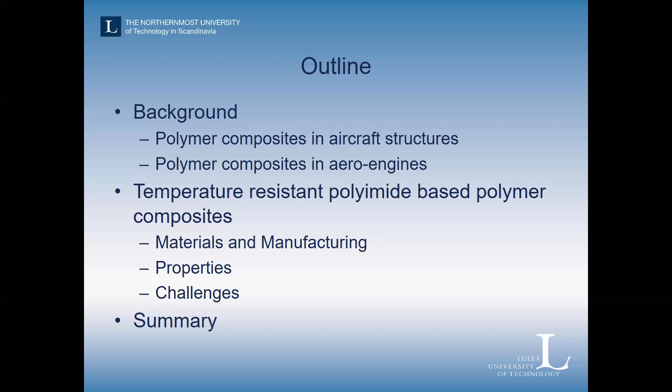Starting with the background, in a very general picture, most of us working with composites are well aware that the lightweight potential of composites is useful for use in the aviation and aeronautics sector. This sector, at least until recently, until everything turned upside down with the pandemic, had a prediction over a very long period of time of around 4% annual growth in the overall aeronautics industry, which is quite a big growth.

There will obviously be a setback due to the decrease in traveling during the COVID situation, but most likely and hopefully we expect to come back to a new normal situation after some time, and it's likely that although there could be a difference in growth rate, it's still expected to grow further. The drivers have been globalization and economic growth of wealth for the population on earth, but with that growth also comes environmental consequences that I think all of us are aware of.

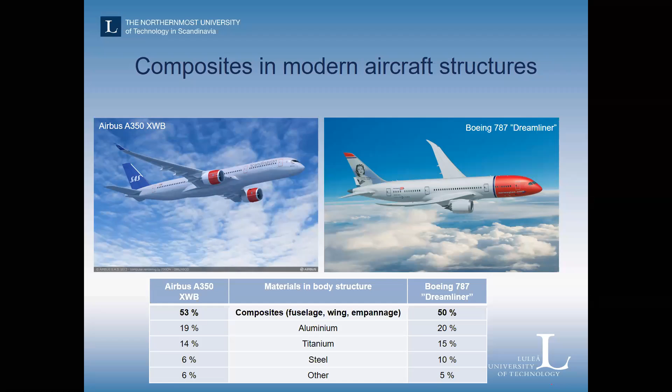Looking back at the 2% per year improvement we've seen, we find composites as part of the solution in many cases because of their lightweight potential in recent aircraft. If we look at the Airbus A350, one of the more recent aircraft they started to produce, as well as the Boeing 787 Dreamliner, the common denominator of these aircraft is that they are largely made from composites. More than 50% of the structure, including the fuselage, wing, and empennage at the back of the aircraft, is made from composites, and that is one cause for the fuel efficiency increase by reducing weight.

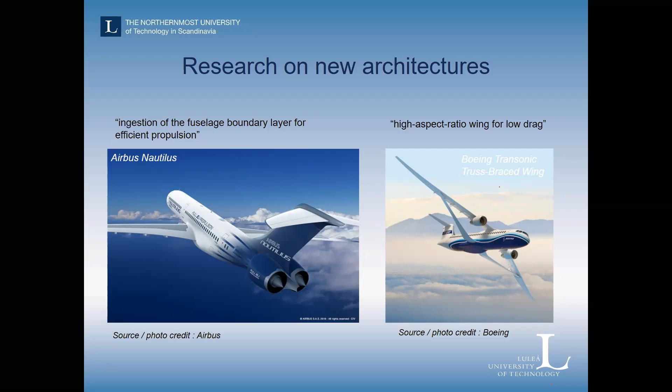So where are we going at the moment? If we look at some innovative concepts currently at the research or concept stage, there are some ideas presented a few years ago but also currently being considered for the next generation aircraft. One is represented here by having engines close to the fuselage and using the boundary layer, where the airflow is good for reducing the need for thrust to drive the aircraft, creating a beneficial effect that doesn't require much force or thrust to drive the aircraft forward. Another way to reduce drag is to have, as indicated on the right, high aspect ratio wings, long slender wings, again lightweight, to further reduce the drag of the aircraft.

New architectures also include flying wing concepts that combine aerodynamic efficiency and structural efficiency by integrating the structure already into the wing. These are concepts, and in recent years the interest in electrical propulsion has also increased, with different concepts being suggested, such as distributed turbine generators and electric fans on the wing structures, in order to move away from the use of fossil kerosene fuels and use electricity as power for fuel.

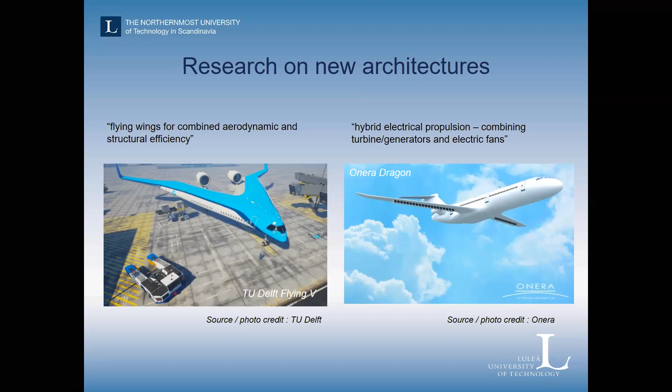In the last few months, I think it was in September, Airbus introduced a concept and an ambition to develop new alternative fuels, meaning hydrogen propulsion using hydrogen gas as fuel in the aircraft. This is currently being launched in Europe by Airbus as a concept aircraft, a ZEROe concept aircraft.

They foresee that a possible solution for the next generation could be, for instance, a turbofan aircraft with hybrid turbofan engines that provide the thrust. The fuel, in this case liquid hydrogen, is stored in the rear of the airplane, so it's basically an extension of the aircraft. Instead of having kerosene fuel in the wings, there's liquid hydrogen in the rear.

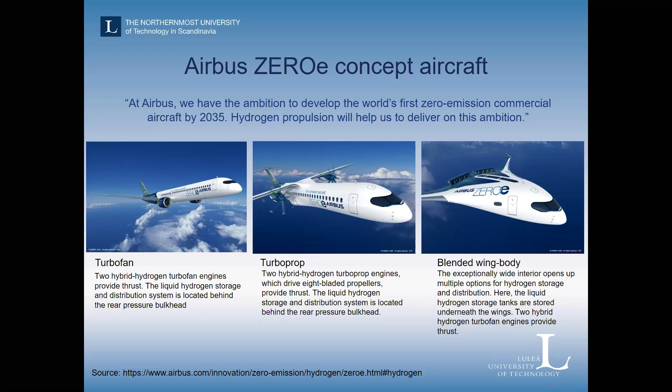Similarly, for a turboprop and more regional aircraft type, they foresee and envisage studies on a blended wing body concept, where hydrogen storage could be introduced in the wing structure or under the wing structures. These are very recently presented concepts, indicating an increasing interest in hydrogen as an alternative fuel, and this opens new research channels for the composite community, which I will come into.

Not only is the body structure of the aircraft made with composite, but if we look at recent developments of aero-engines, we also find carbon composites in these structures.

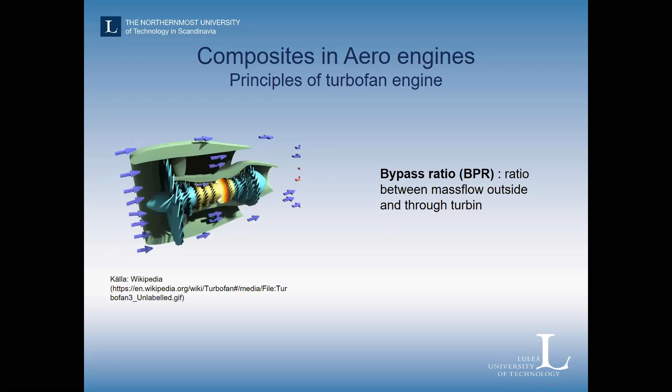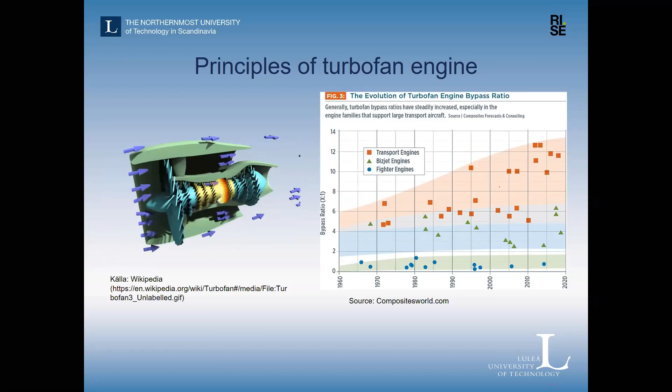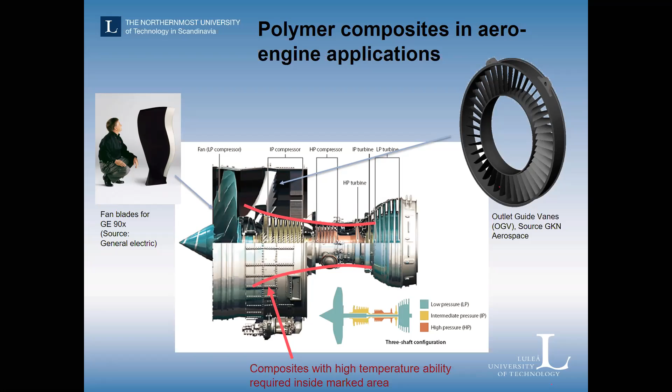We see that, for instance, the fan blades at the front of the engines are made, for some recent turbofan engines, from composites, carbon fiber reinforced epoxy. Research is also being done on the outlet guide vanes, OGVs, placed behind the fan—these are static vanes that don't rotate in the engine but transfer the load from the compressor to the outer fairing of the engine and then on to the aircraft. So it's a highly loaded structure, and currently there's been quite a lot of research into using carbon composites for that too.

The carbon fiber fan blades you find in General Electric engines—this is a rather large engine, so the person here on the right is small compared to, or similar in size to, a fan blade, rather large structures.

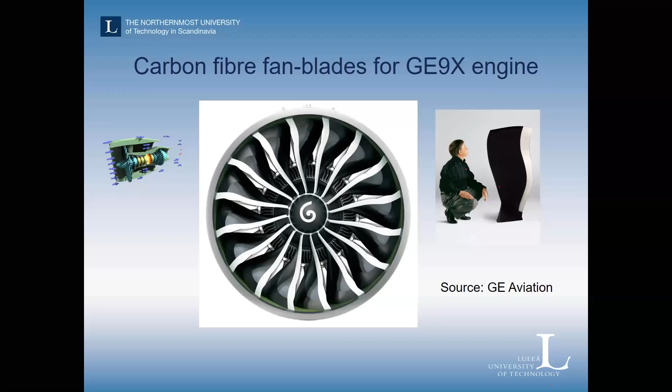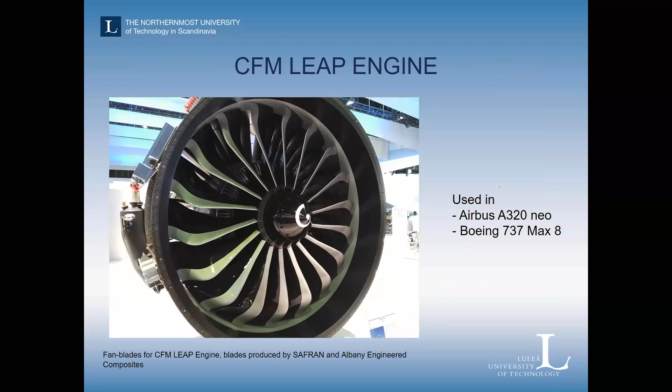Another example is the LEAP engine, whose blades are produced by a French company, Safran, also made in carbon composites. This engine is used in a lot of the Airbus A320 and Boeing 737 MAX aircraft, so they're already in use.

As indicated, the outlet guide vanes, to my knowledge, aren't used in any aero-engine at the moment, but there's quite a lot of research going on, and this is a picture of a demonstrator structure that was built in a European project some years ago.

And to the right, there is some—I mainly took this image because two of my former colleagues are in that image, so they can be found there.

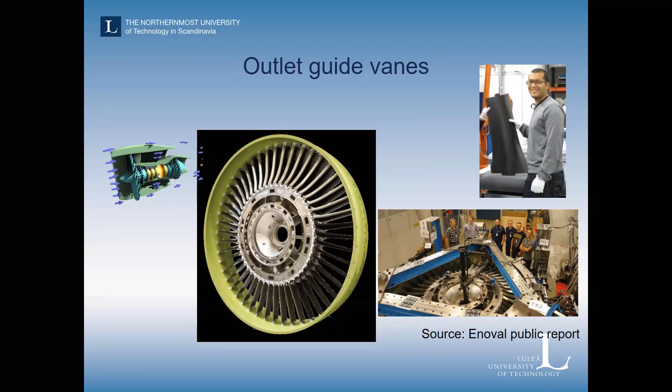So with this as a background, I think the motive here to give that background is to convince and argue that aeronautics technology development will continue to be a strong driver for advanced composite research. And in my opinion, what is currently the main area for research that is going on and will be required for the future is this cost and eco-efficiency driven manufacturing.

A lot of structures were previously made with autoclave curing for the fuselage and wing structure. This is a very costly method, so out-of-autoclave processing of thermosetting is something there's a continuous need to develop and mature.

Also, bio-based composite constituents, both fibers and matrices, is an area that needs to be developed, as well as thermoplastic composite processing and fiber reinforced thermoplastic composites for fuselage. There's quite a lot of work going on developing PEEK and this type of high performance polymer composites, as well as recycling.

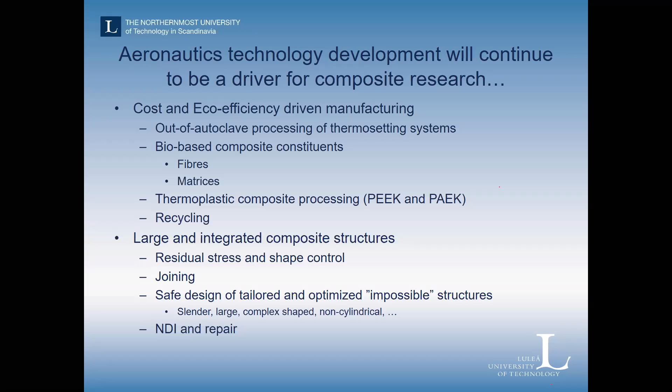Joining continues to be an issue. And again, tailoring and optimizing the composite structure, non-destructive inspection and repair, is clearly an area of focus.

If we look at the trend now to start looking more into hydrogen as an alternative fuel, it will require new storage solutions for the aircraft. Most likely composite pressure vessels are likely to be used, in my opinion, for hydrogen storage in these new structures. So it will put another requirement, and of course safety aspects will be important.

So materials, manufacturing, and sizing of composite pressure vessels or storage solutions for hydrogen will be an important aspect that needs to be developed.

Multifunctional composites like morphing structural batteries is an area which is also interesting, where you can use composites both for storing energy, as a structural component, and for thermal management.

But the last area, which will lead me to the next stage of the presentation, is really in order to be able to produce these larger engines and to have temperature resistant composites. This is an interesting and needed area to do research, which can be used also in aero-engines. An aspect there is really manufacturing, because it's not very easy to manufacture.

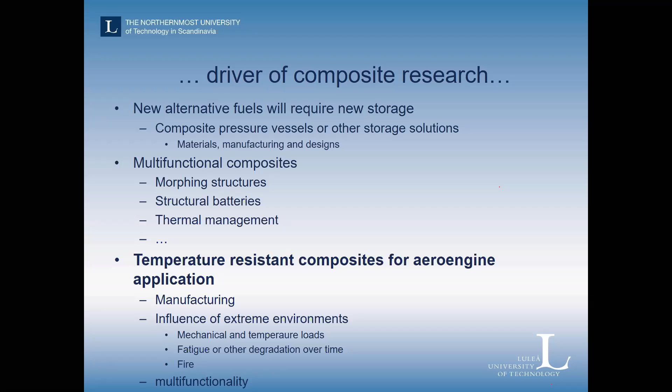So this leads me to the second part of the presentation, where we will look more closely into composite materials for high temperature applications.

I will show this indicative chart on different polymers, where the glass transition temperature is on the y-axis, and in this case cost is on the x-axis, indicating some of the high performance polymers that can potentially be used for high temperature applications.

But I've shaded out the ones that are really below, let's say, Tg below 200 degrees, which means phenolics and epoxies will not be discussed much in the coming slides.

So what I consider when looking into high temperature are the bismaleimides, cyanate esters, polyimides, and phthalonitriles. All of them are more or less expensive - some are extremely expensive - but all of them have high glass transition temperature and various degrees of thermal stability.

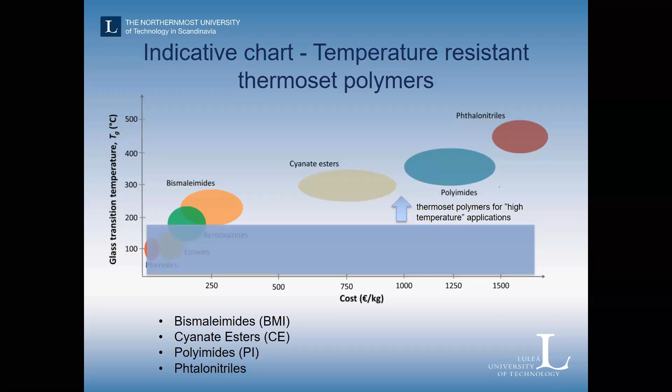I will present the polymers that we've been working on mainly, the polyimides, in the coming slides, and what we've done in the area of polyimide composite development, both in my previous work and what I continue to do at the university. So this is the development strategy for when we work with high temperature polyimides.

It's nothing revolutionary here for composite people. We are all aware that in order to achieve performance of a structure made in composites, we need to take into account the manufacturing, the material and the properties and the design in a very holistic way, since we manufacture the structure at the same time as we do the material, and we also design both the meso and micro structure at the same time, and this will influence the manufacturing and the type of material we can use. So this is not a surprise to you.

What we did was we started really in 2012. So it's been going on for about 7-8 years now, and we've been using mainly polyimide types. We've been working with end users and material suppliers, universities and research institutes, the ones that we have, and try to mature technology for the high temperature polyimides simultaneously in different areas, both when it comes to materials, manufacturing, and properties.

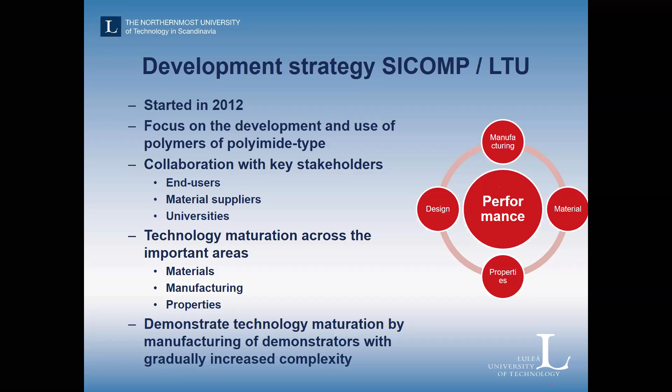Gradually increasing the complexity of the components. Early on in the development, we started out by agreeing that we should focus mainly on the process of resin transfer molding for manufacturing, meaning that we work mainly with systems where we start with a dry preform, lay up and drape the preform in a preform tool, put the dry preform in a mold, close the mold and inject the liquid resin into the mold, then cure it in the mold, demold, and do the final processing.

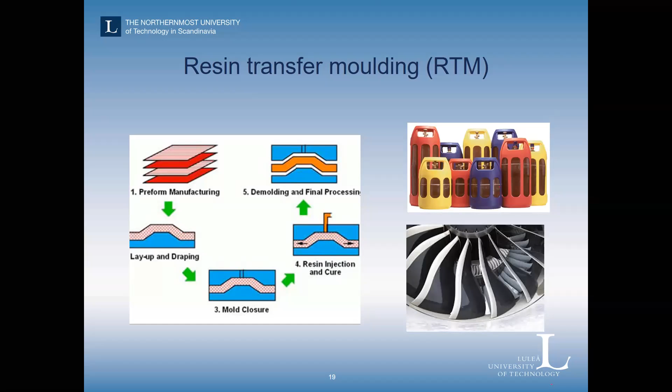So this is the same process that is used, for instance, for some blades, and also for some other applications. So this is the process we've been mainly looking into, and then we've also been using. Typically, we've been using a lot of this, as you will see.

The processing of the high temperature material is done at high temperature, meaning that we need to adopt the reinforcement to that. So we can't really use so-called non-crimp fabrics with stitches; we use primarily weaves, carbon fiber weaves, and the baseline material we've been using is an 8-harness satin weave most of the time for the development work, but also in some cases other alternative architectures, like plain weaves, thin ply materials - that is lower surface weight reinforcement that can produce really thin ply composites. These are a bit coarser when it comes to the structure.

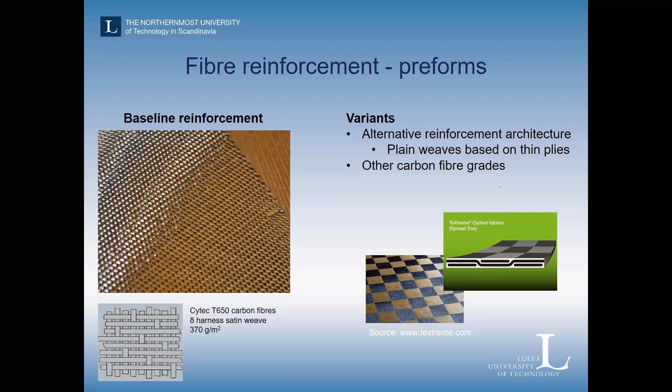We've been working closely together with a company that develops and produces polyimides, this chemistry, so we developed this together with them. This Phenylethynyl-terminated polyimide system, also sometimes referred to as PETI, is a thermosetting resin. When it's provided, it comes as a low molecular weight resin formulation, and you see the picture of how it looks when it is delivered for processing. It comes like a solid material or a powder in its uncured state.

It's based on the 6FDA dianhydride base, and then through an imidization process, that's creation of a reactive end capper - phenylethynyl end capper - onto the structure, and also to some extent some reactive spacers that are also chemically reacted onto this to create the polyimide monomer. This can then, in the process that we're doing, be cross-linked to create a highly cross-linked polyimide with high Tg.

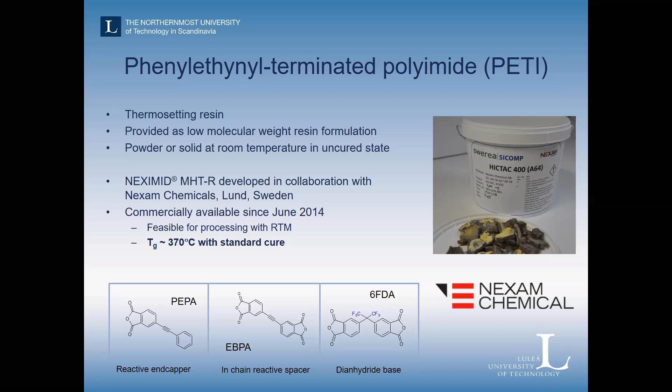So what we've been doing in the early stages of development, when looking into the first step to see how to work with these materials, has been to look into simple or straightforward DSC analysis to run dynamic heating experiments with the primary goal to analyze the cure kinetics and the onset of curing reactions.

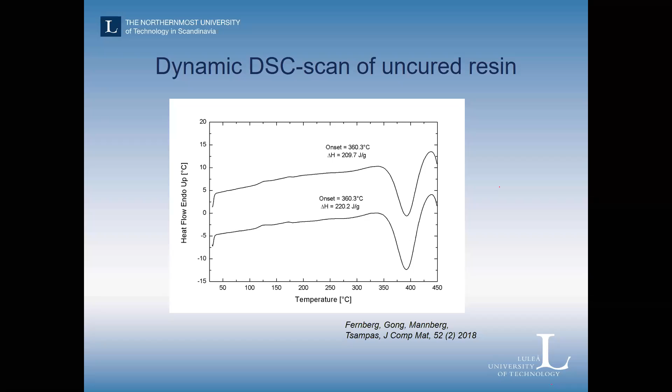So this type of DSC curve shows here that the onset of curing is indicated by the onset of the peak, or the peak that is upside down - the valley here - indicates when we start to have a reaction in the cross-linking. There's an onset of this curing that starts at around 300. In this case, it indicates 360, but really the curing is starting a bit earlier than that, so we can have reactions that start at lower temperature, but the main reaction takes place at 360 or even higher. The total heat of reaction during a cure is around 210-220 joules per gram, so it's slightly lower than a typical epoxy system in terms of reactivity and exothermic reaction.

Rheology characterization is important when looking into the processability of these types of resin. For that purpose, we've been using a rheometer in two modes: viscometry mode, with continuous shearing of the viscous fluid, and oscillation mode, where we detect the complex modulus and complex viscosity, capturing both the elastic and viscous part of the response.

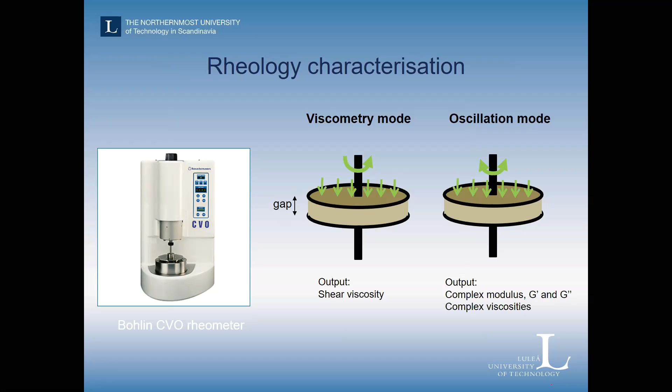So two modes. The first one, complex viscosity, we've been using primarily to estimate the time to gelation of a curing system, in order to understand how long we have for processing these materials. These are complex viscosity measurements made at 330 degrees. It's not where we have the highest reaction rate, but we determine this for elastic and viscous modulus.

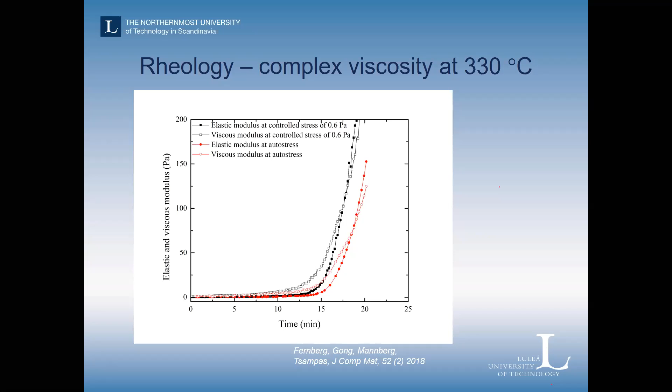The filled circles are for the elastic part, and the viscous part is the open circles. Traditionally, the time to gelation is determined in this type of rheology setup by the intersection between the elastic and viscous parts - when they cross each other, that's an indication of gelation. At 330 degrees, we don't have much time, but we have around 15-20 minutes to fill the mold, which is quite short but still something to work with.

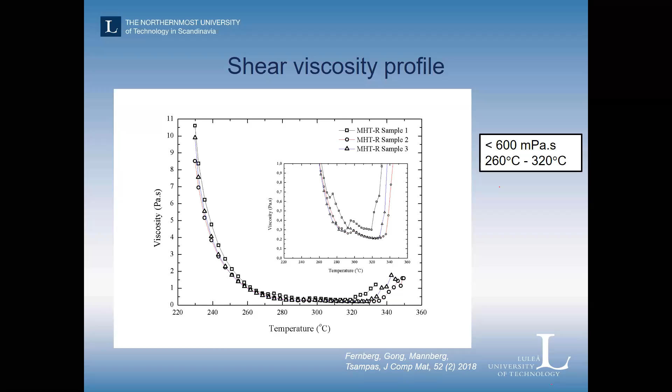With that information, one can start composite manufacturing, and for that purpose we have used an RTM facility for high temperature RTM. This unit has the possibility to process resin at temperatures up to 300 degrees. Essentially, on the image here - let me see.

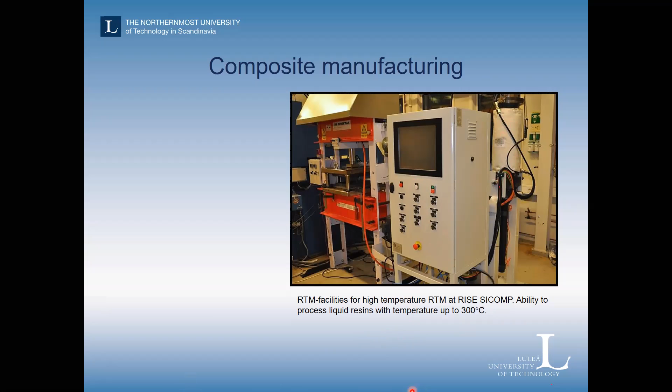So what is done in practice as a curing procedure for these materials: we start by melting and homogenizing the resin inside the chamber, keeping it at 240 degrees because we know it melts there. We do a degassing operation at 240 degrees - it is liquid, but rather high viscosity, with no reaction occurring.

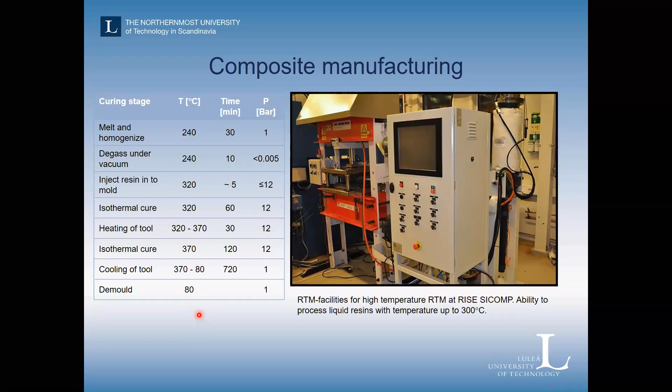We are then able to inject the resin at that temperature through the pipes into the region, and do isothermal cure inside the mold, keeping the mold at 320 degrees to reduce viscosity and do the mold filling. Then we do an isothermal cure, heating the tool for 60 minutes at 12 bar - high pressure, isothermal cure at 370 degrees - then cooling slowly down to room temperature for demolding.

Well, I start to have some issues with my presentation here. Let me see if I get back. I apologize.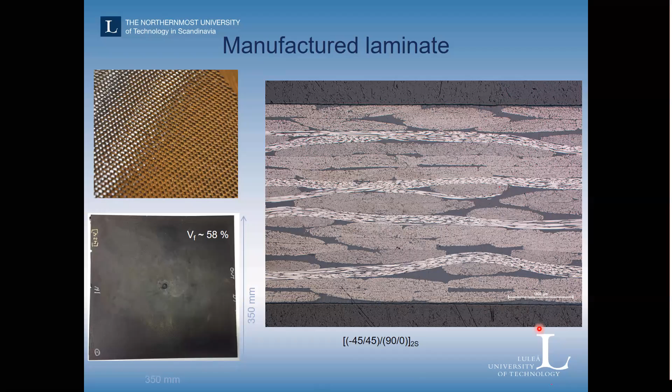We run DMTA characterization to characterize the thermal properties, and we see that we have some materials behaving as we're expecting, with a TG of around... in this case, no post curing, there is an onset TG of around 330.

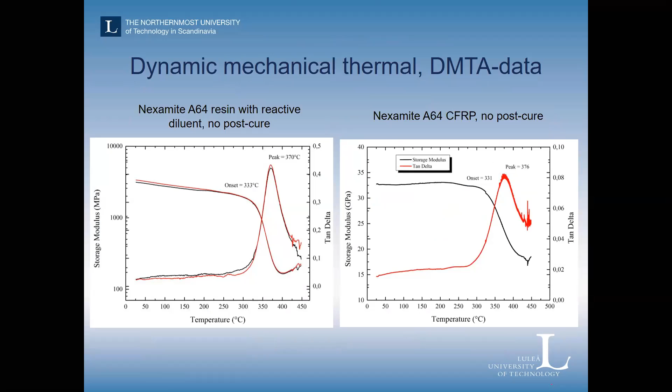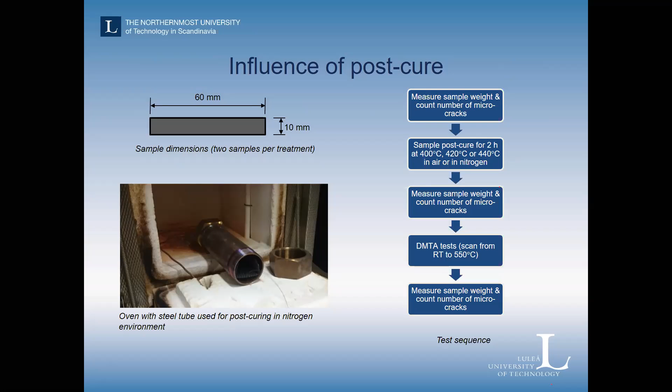If we look at nitrogen curing, we have a higher glass transition temperature than when we do it in pure air. What is peculiar is that we don't measure an upper limit in the tests we have been running. We don't have a very good explanation for this yet, but it's not likely that it's some kind of artifact. We're thinking that this is...

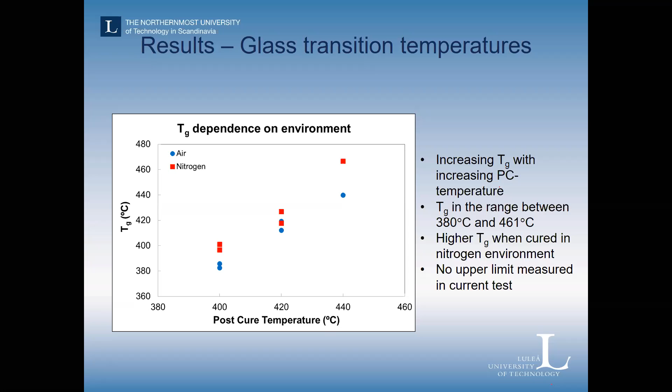Then there's a weak tendency that weight loss increases with the post-curing temperature, but not significantly. After DMTA, there is definitely a decrease, but that is rather expected since we're going up to very high temperature and doing it in air. It was a bit difficult to conclude much because of the variation in initial properties of the material.

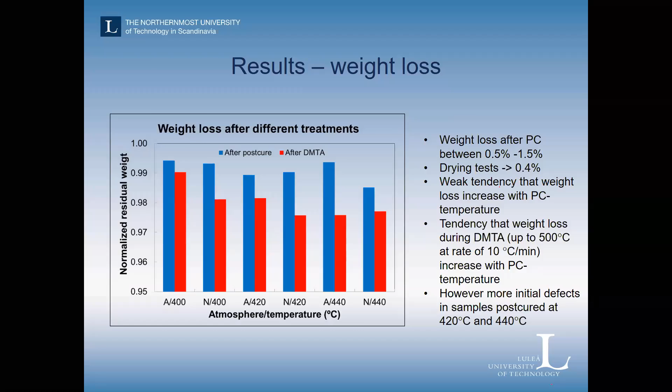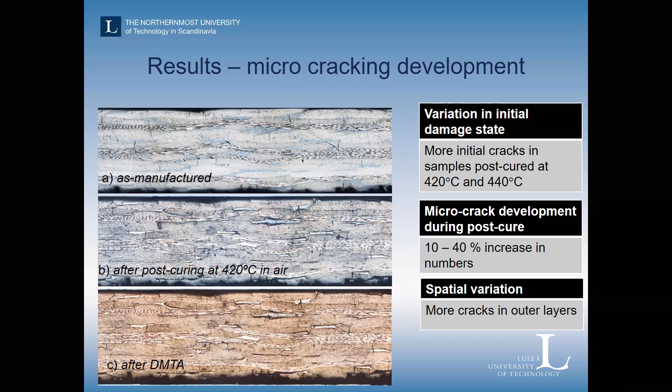When we look at this material, we notice that on the surfaces there are micro cracks developing due to aging, and we see that the increase in numbers is around 10 to 40% on the surface of these materials on the edges, with more cracks in the outer layers—clearly something that needs to be taken into account when looking into how they operate on the surface.

If we increase the temperature to 320 degrees and test the properties at that temperature, there is a decrease mainly in compressive properties in terms of stiffness.

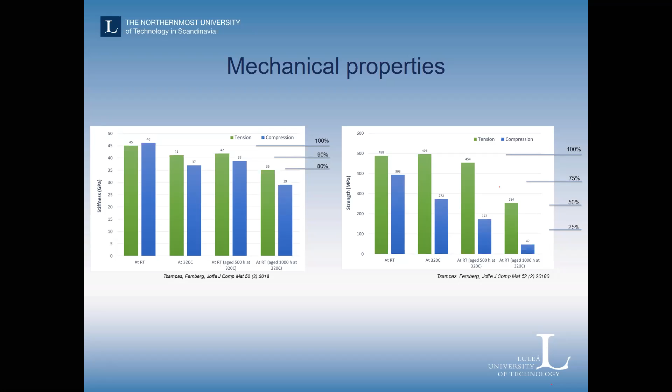So coming to where do we need to continue to work in order to take this into a more elevated state of knowledge and maturity. The three areas I would like to raise are cure optimization and residual stresses. This is critical for these kinds of materials, and we need to continue to understand better the cure kinetics and property development during cure. One way is to understand viscoelastic contribution to stress relaxation that occurs during manufacturing at this temperature. The other thing is thermal oxidative stability, again the influence of physical and chemical aging, so work to identify and decouple the degradation mechanisms that occur at high temperature. And something I haven't mentioned a lot is fire resistance, but I will.

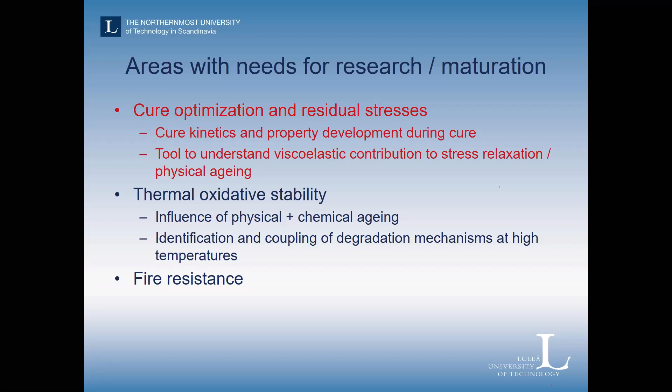So, cure optimization and residual stresses. What is this? Just to illustrate why this is so important, especially for these composites.

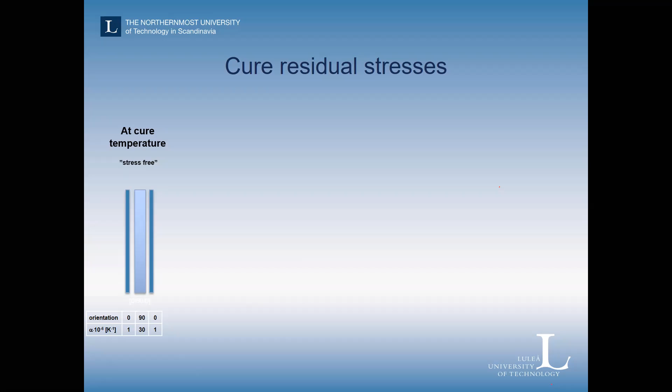If we consider the different layers, when we do the cure and everything is in a liquid state, it's a stress-free state. If we think of this as a laminate, viewing the edge of a laminate, the fibers in the outer layers are in the 0 degree direction, and the middle layer fibers are in the 90 degree direction. There's a big difference in thermal expansion coefficient for these different layers. So what happens when we cool it to room temperature?

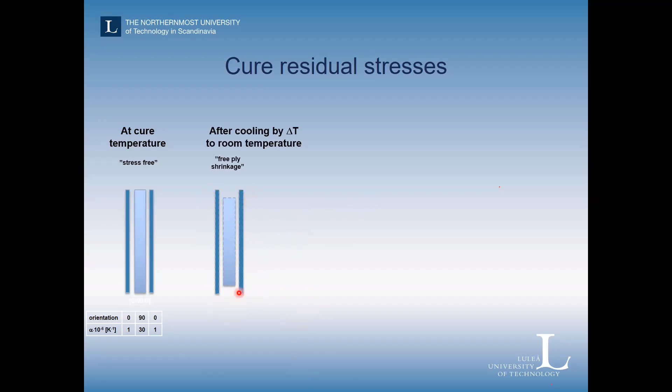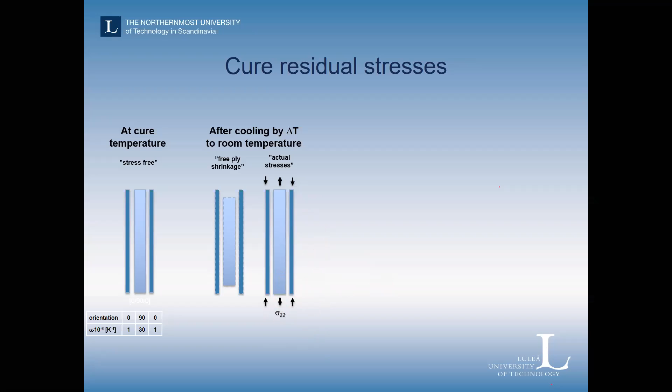If we just consider the free plies, the outer plies in the 0 degree direction don't want to shrink at all because it's carbon fiber with very low thermal expansion coefficient, whereas the middle layer wants to shrink. But because they're glued together, they can't shrink independently, they shrink the same amount. This means the 90 degree layers are subjected to tensile stress because they want to shrink but can't, whereas the 0 degree layers are under compressive loading. Especially the tensile loading on the 90 degree layers is very important and provides very high stresses, and this is what sometimes creates the cracks we observe.

If we just take the linear elastic laminate theory, we know the residual stresses depend on the thermal expansion coefficients, the stiffness, and the delta T. In this case, the delta T is up towards 300K, so it's very large. If we calculate a simple estimate, we notice that in principle the stresses generated during cure are up towards 75 megapascals, which is almost in the range of the theoretical strength of a 90-degree layer in the transverse direction. So it's more surprising that it doesn't crack more.

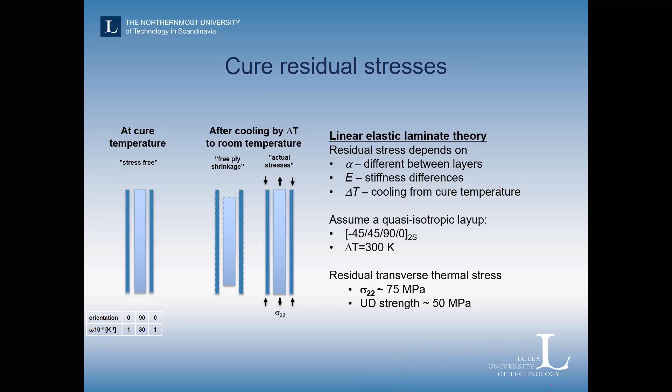This is something we're trying to develop further understanding on, because it's very important both for the part shape deformation and all the built-in residual stresses in the material. It's also important to take into account the interactions with the tool, since we're working with RTM processing, and whether there are other stress dissipating mechanisms.

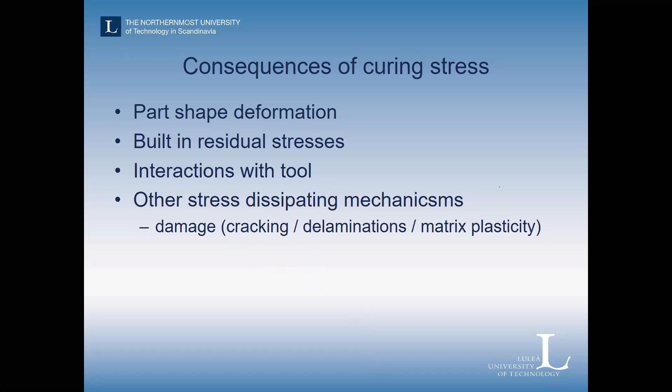I think I will skip this one. Another area is thermal oxidative stability, the influence of physical and chemical aging, which is needed to understand really how we can use this material under these severe conditions, what are the limitations, and how we can design components with these materials.

First of all, we need to understand the influence of physical aging, which comes from viscoelastic processes or reorganizations of the molecules below the Tg that take place in these composites. We need to understand them and compare them to understand how important they are in relation to the chemical aging that also occurs, where in the test we're exposing the material to high temperature, where we can start to have hydrolysis oxidation reactions that can eventually cause chemical bond breaking and mass loss due to outgassing.

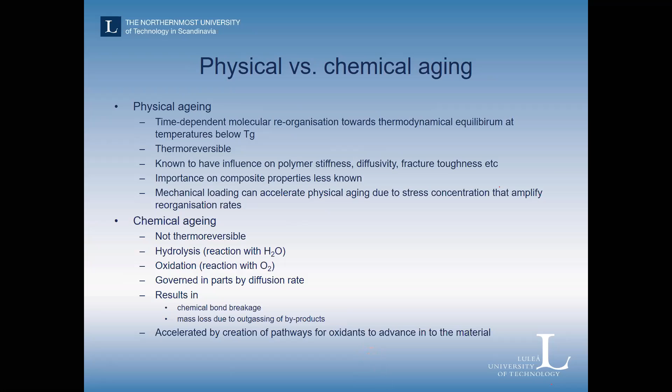And this can then also be accelerated by the creation of cracks in the material. We already saw the consequences of physical and chemical aging on the properties.

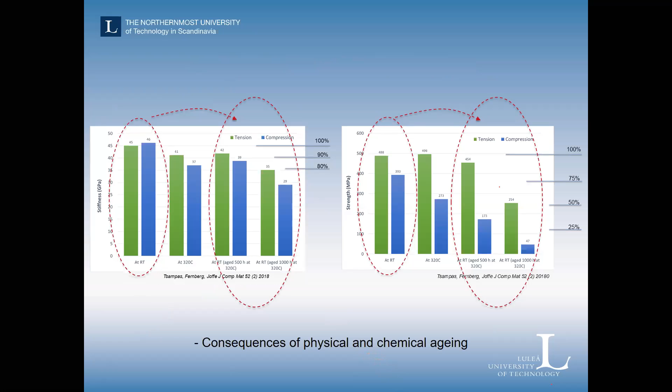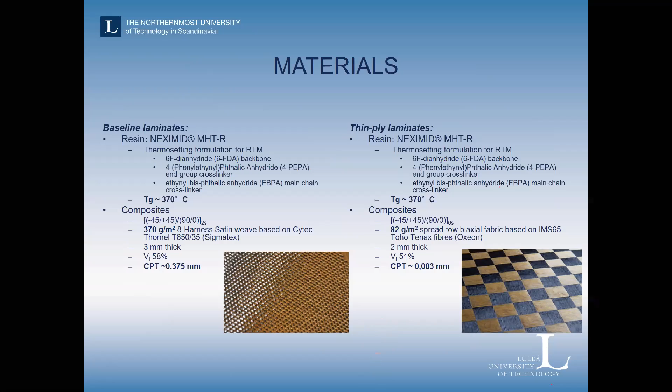So what we've done is show some results from a study we conducted, where we used this thin ply material on the right, with really low surface density fabrics that create really thin plies. The idea here is, we know from previous work that thin plies have a tendency to prevent this transverse cracking that could be caused, for instance, by thermal stresses. We wanted to see if by introducing thin plies to prevent these cracks, we could decrease the aging of the materials. The hypothesis was that with fewer cracks in the material, there would be less pathways for exposure of the material to oxygen.

So we tested these materials. These are cross sections of laminates that we tried, shown to scale. To the left is the baseline material, and to the right is the thin ply material. This indicates that the thin reinforcement creates quite a lot of thin plies compared to the coarser, higher surface weight laminate, but they have rather similar volume fractions. Let's see.

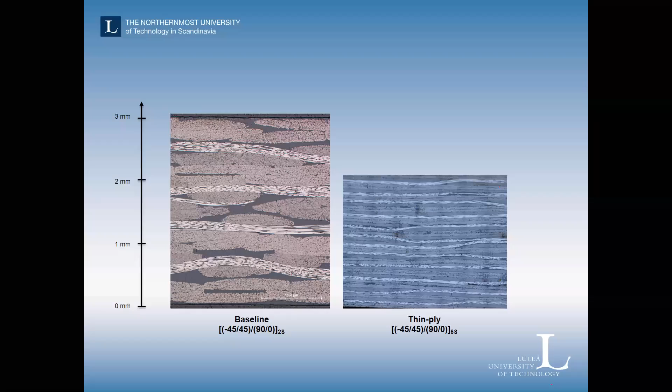Let me see. Okay, now it's responded. It took a while.

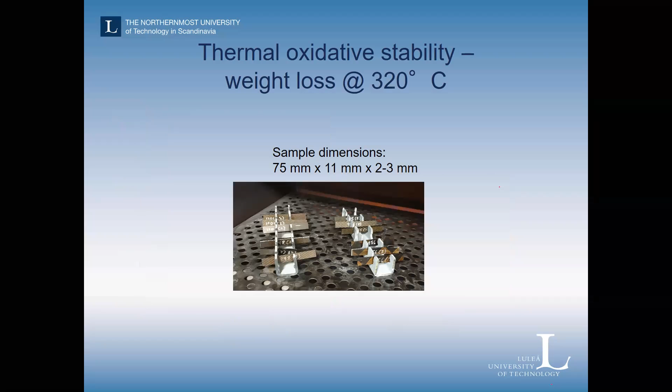So we do thermal oxidative stability testing by measuring the weight loss at 320 degrees over time. These are the type of samples we place in the oven and measure the weight loss over time. We obtain results like this, where we have the weight loss in percentage of mass loss versus the matrix weight over time.

During the 500 hours, we notice an increase in the weight loss. The yellow one is a baseline material, the satin weave. The red one is also a baseline, the same but from a different manufacturing batch, and the green one is the thin ply. What we notice, first of all, is an initial loss due to moisture loss in the very early stages of the test.

Then the weight loss starts to increase - there's an accelerating trend. There's quite a big variation between the batches, but small variation within the batches. One thing we clearly observed is there's no noticeable improvement from the thin plies.

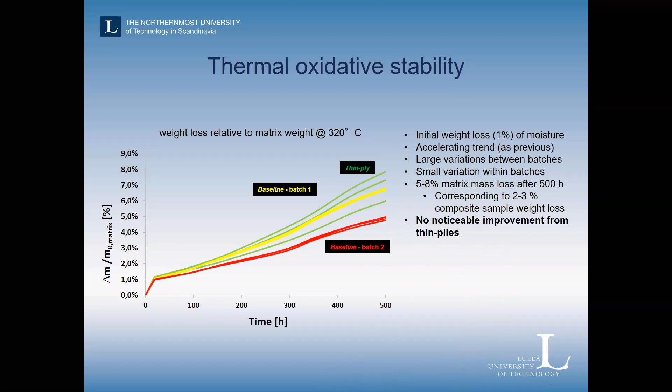What seemed to be more important - if we go back and look at the red one and the yellow one, they are quite different. The big difference between the yellow one, where we lose quite a lot of weight, and the red one, is indicated here: the presence of initial voids and cracks in the first one was quite large when we looked at the microscopy images, whereas the baseline of batch 2 was rather flawless.

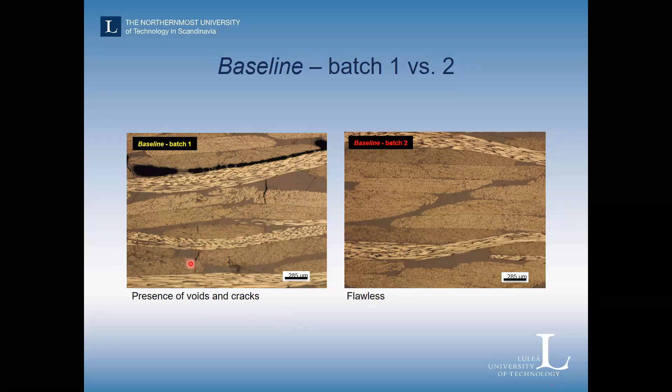So this seemed to be one of the very important aspects, and we know from previous work that these kinds of defects create paths for oxygen and degradation to occur.

The thin ply appeared to be better when we first looked at it, but after closer scrutiny, we found there are micropores also in this material that could create pathways for oxygen and accelerate degradation. Despite the fact that we didn't see any transverse cracking in these materials, we didn't see any improvement in the degradation from a degradation point of view.

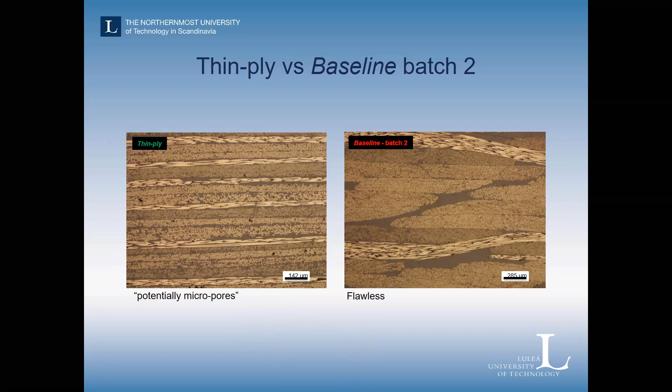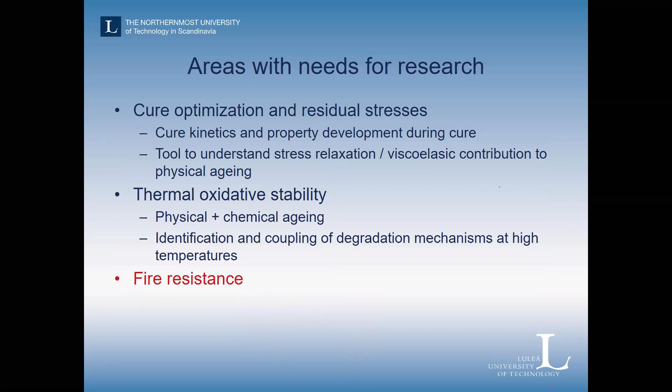So lastly, the last item I'd like to bring up, an area we're interested in researching further, is fire resistance. This is an important aspect, sometimes not really researched that much, in my opinion. It doesn't get the attention it deserves, but it's going to be a big problem and big challenge for composites. It is a big challenge.

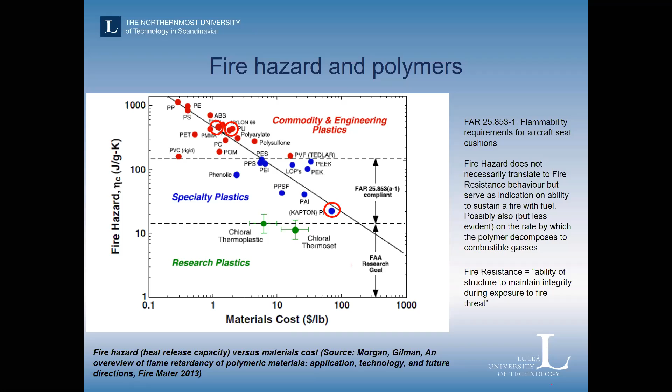And in order to save some time - so we can go back here - the first way of looking into the thermostability of composites is the obvious way: to look at TGA, thermogravimetric analysis, and look for degradation, mass losses, when running temperature scans.

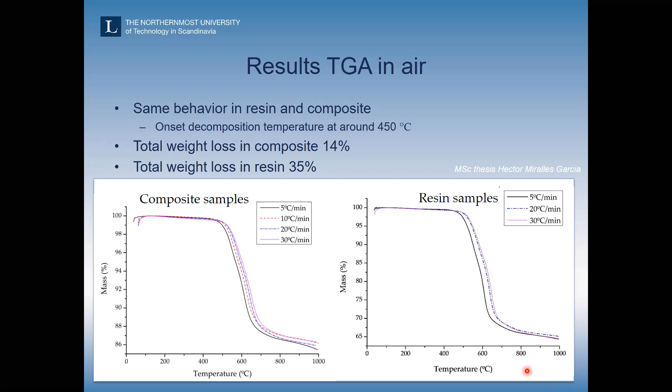It degrades and loses mass. When we run it up to 1000 degrees, we notice a rather small decrease in weight, comparatively small at least - 86% mass remaining during this loss. So it's not completely combusted even up towards high temperatures like this. We have 65% remaining of the neat resin samples after completion. These are done in air.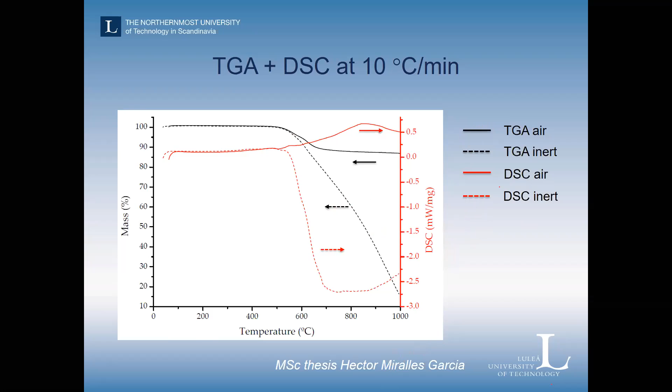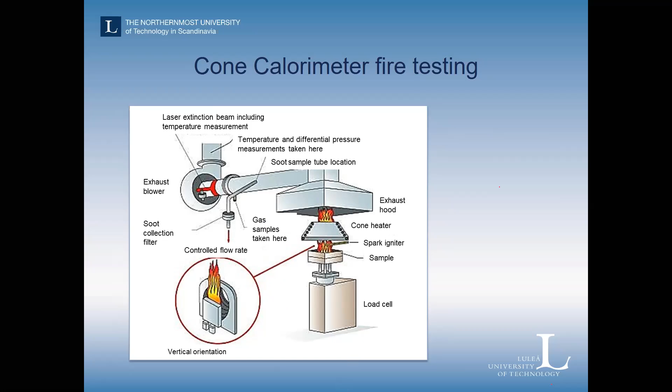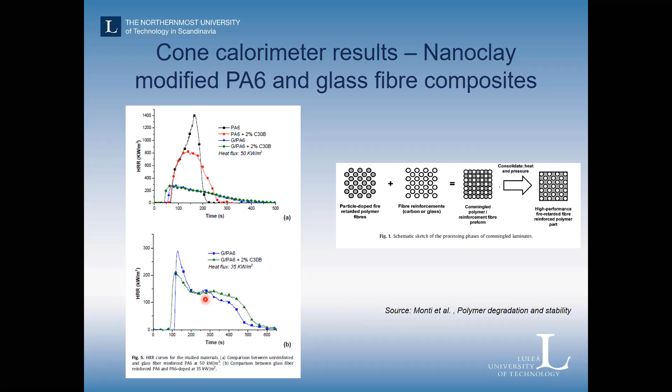By adding glass fiber to make a glass fiber composite, we have a similar time to ignition, around 1 minute, and it takes around 10 minutes to completely combust, with a maximum peak heat release rate of 200 to 300 - so substantially lower. This is typical for polyamide composites.

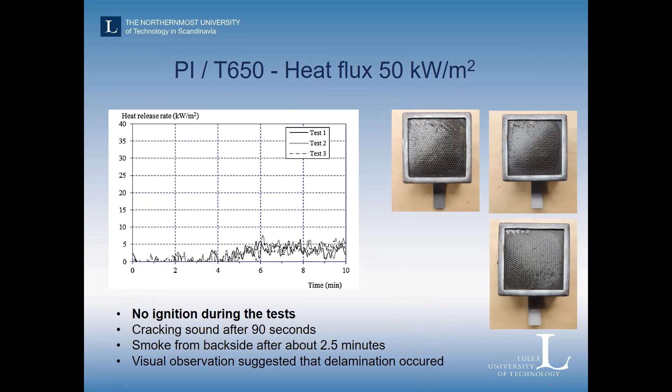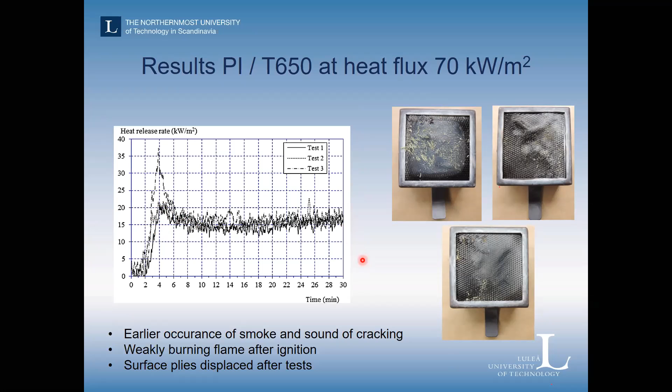Increasing the heat flux to 70 kilowatts per square meter, it still took around 4 minutes for something to happen, and then it happens - there is some weakly burning flame after ignition. Compared to the heat release rates we observed for polyamide, this is very, very, very low, and it keeps on burning at a very small, low rate until over 30 minutes. So it takes a long time.

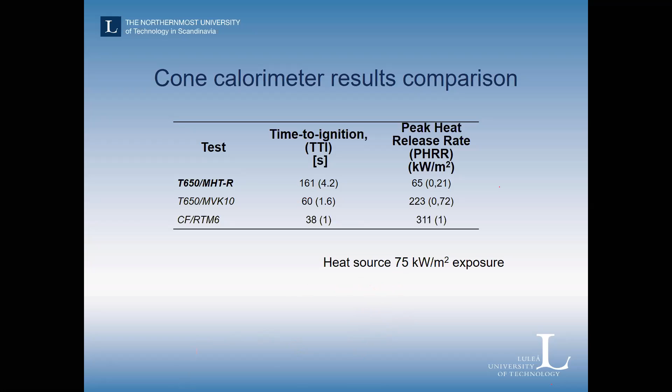So with that, I'm planning to conclude my talk now and just give a summary of what I've been trying to convey. So a reminder of what we've been talking about.

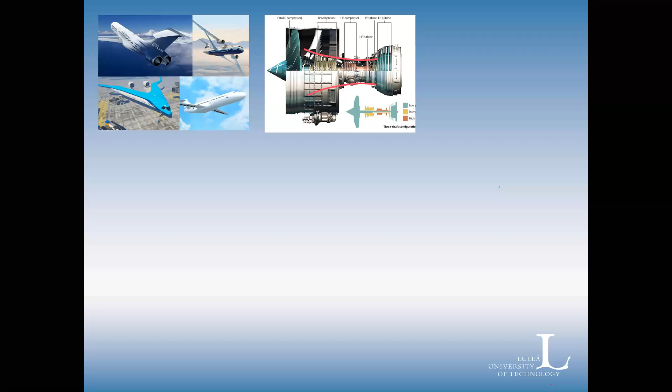I hope you agree that we started out by looking in general at composites in aircraft, and how the sometimes extreme challenges of aircraft are really good drivers for composite research and development. Not only the aircraft structure, but also the aero-engines are areas where composites are largely used. There are some areas where traditional composites can be used, and areas where we need to look into really high performance composites in order to expand the use of these lightweight materials.

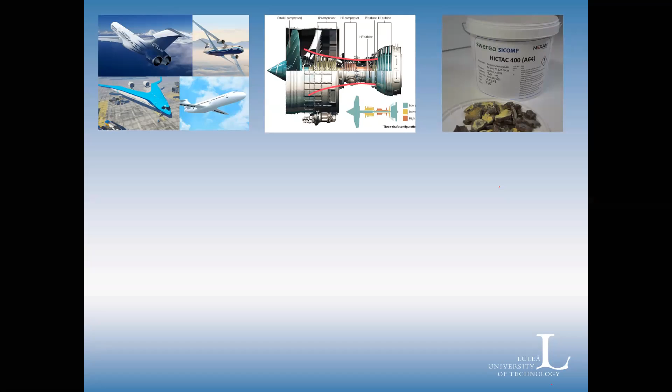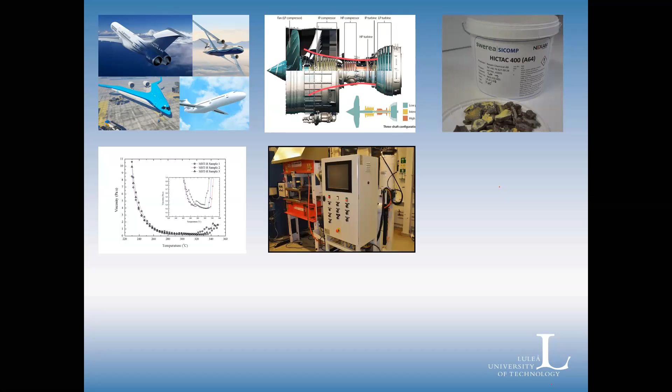We've been using this newly developed polyimide resin type, the thermosetting polyimide with quite extreme thermal properties. We looked into developing the processing techniques required to find a good processing window, which is solid materials engineering work. There were a lot of practical issues we don't have time to go into here, but a lot needed to be solved for it to work. Just finding, for example, sealings that work at 320 degrees is certainly not trivial. So there's a lot of tricks that had to be developed over the period we've been working on this.

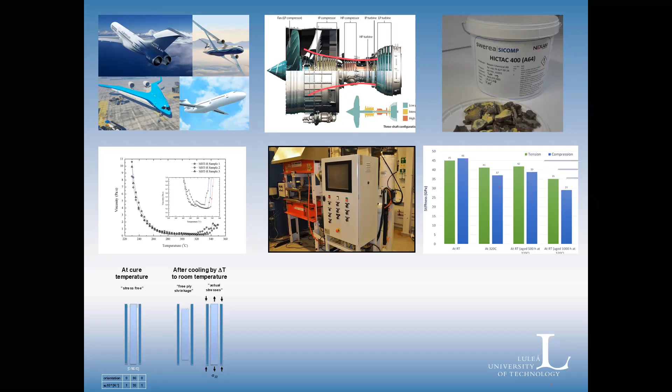In general, how were the properties developed - the properties are good, but there are also knockdowns because of aging and temperature. A bit on how residual stresses are really important in all composite processing, but particularly important for these materials where we process them at such high temperature. And also about the aging we conducted. Thermo-oxidative stability is really a key issue we are keen to understand, developing understanding of the mechanism for degradation of these materials at high temperature.

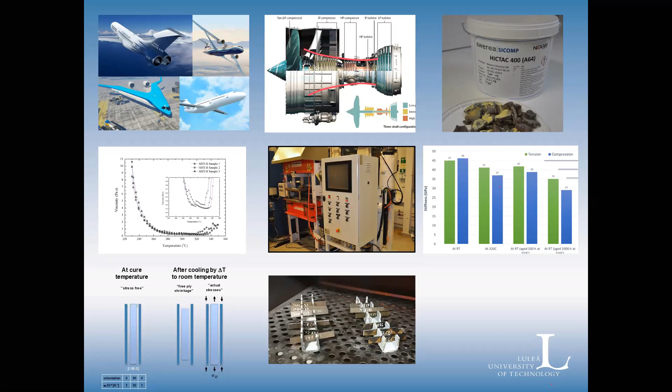And lastly, a bit on the fire behavior.

Some acknowledgements. I think it's worth noticing that the colleagues at RISE SICOMP and the colleagues at LTU are really appreciated. A few persons not known to you, but really appreciated by me and the colleagues, are Magnus Edin and Spiros Tsampas, who were largely involved in the initial work, and some of the industry and university partners we've been working with - a few of them mentioned here - and the funding agencies, of course.

So with that, I'd like to close.

Okay, thanks a lot, Patrik. I really enjoyed myself here in your talk. Some familiar things to me with RTM and everything, but yeah, brilliant talk.

Thank you. I do have some questions. We have around 10 minutes for questions. So can I start? Yes, please, fire away. Okay, I can fire away. Okay, I'm gonna start with the first one here.

It's related to one of your earlier slides, about bio-based composites, matrix or fiber. Do you consider a tendency to develop aircraft parts with these bio-based composites? And what component could be replaced by these bio-based composite materials?